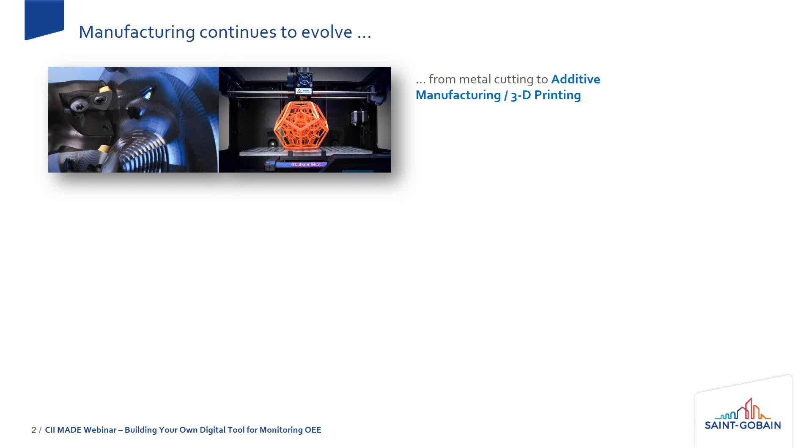Thanks to new innovative materials and new processes like additive manufacturing, what you see on screen - manufacturing was always referred to as removal of metal or cutting, removing metal from a stock bar to create what you want. Now it's about creating something from nothing, building whatever part you want through additive manufacturing, or 3D printing. This is a new evolution with digital technologies.

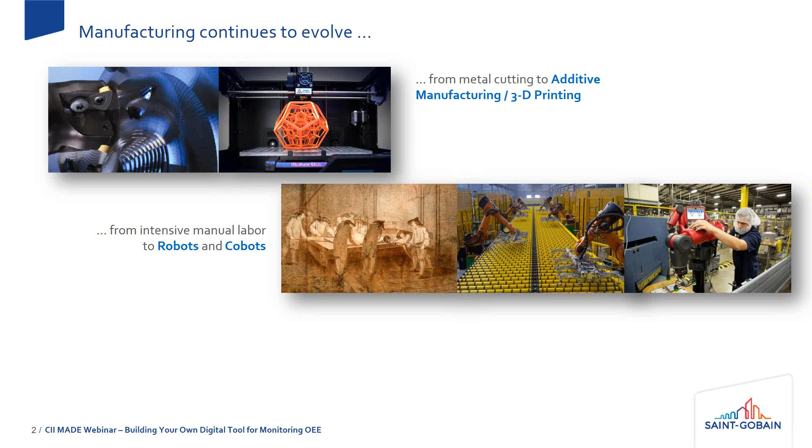Manual labor is slowly giving way to robots, which is not something new, but we also see the emergence of new types of robots called collaborative robots or cobots, which work along with people. It's not replacing people, but complementing them. They learn very fast from people and work along with them. Here you see a picture of an operator teaching a cobot to perform a particular operation - these are new generation equipment coming into picture to alleviate physical labor.

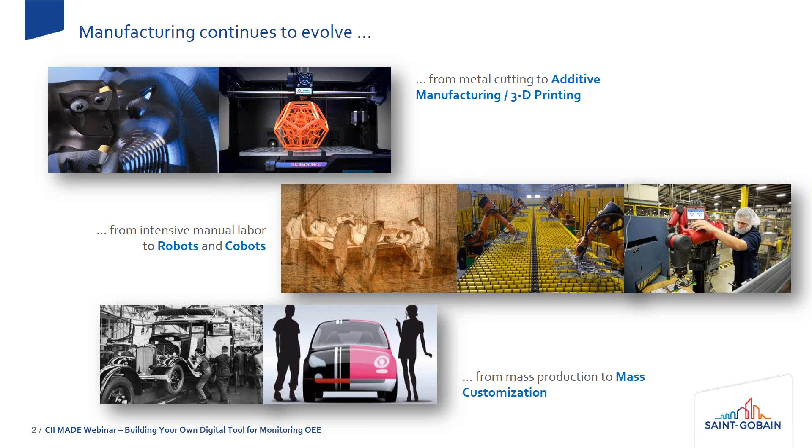And then finally, from mass production to mass customization. Today people don't want standard products - everybody wants products customized to their own wishes. So we are moving from an era of mass production to mass customization. This is very clearly seen as a trend in manufacturing today.

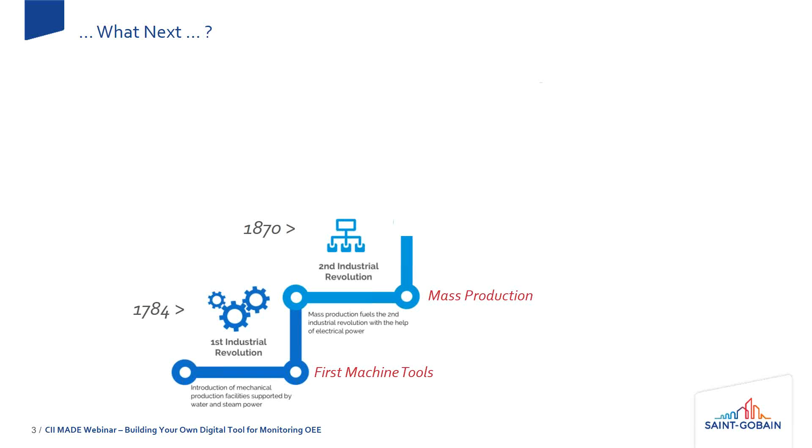The manufacturing process itself goes through a series of revolutions. Many of you are aware this started in the 18th century with the first industrial revolution, when the first machine tools were introduced, to the 19th century in the 1870s where mass production was introduced, and the 1970s saw huge industrial automation with CNC machines coming into play. Now in the 2000s we see the fourth industrial revolution, where we see the internet and several things getting connected - what we call the Internet of Things. We now see a lot of connected enterprises where it's not just disconnected equipment or disconnected lines, but everything connected seamlessly, sharing information in real time, leading to several improvement opportunities across the manufacturing spectrum.

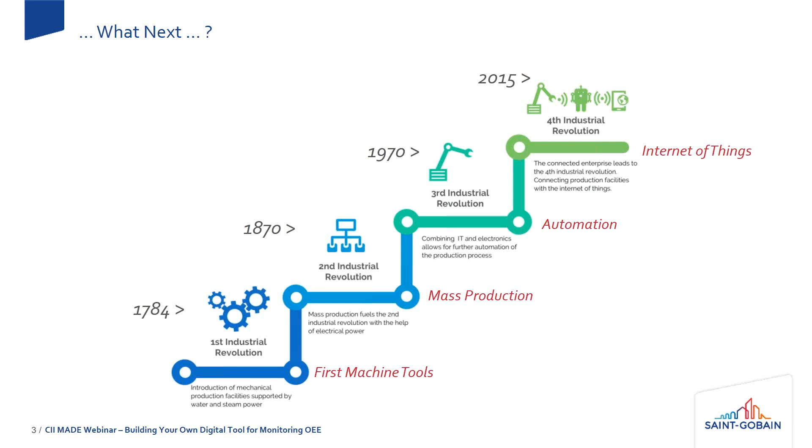So this is what we are seeing - we are at the beginning of an era which we call the fourth industrial revolution, where digital technologies are really taking manufacturing to the next level.

So ubiquitous connectivity is really driving the digital wave. I used to always ask in meetings or presentations, what is this digital all about? Digital has been there for so many years. It's not something new, the word digital has been there for a long time. So why is it coming back again? What is the new buzz about this digital?

So what is digital in today's context is your connectivity and mobility. The all-pervasive internet in the form of mobile internet is really revolutionizing the way we look at information, we share information, we control information. So this web plus mobile is the new digital.

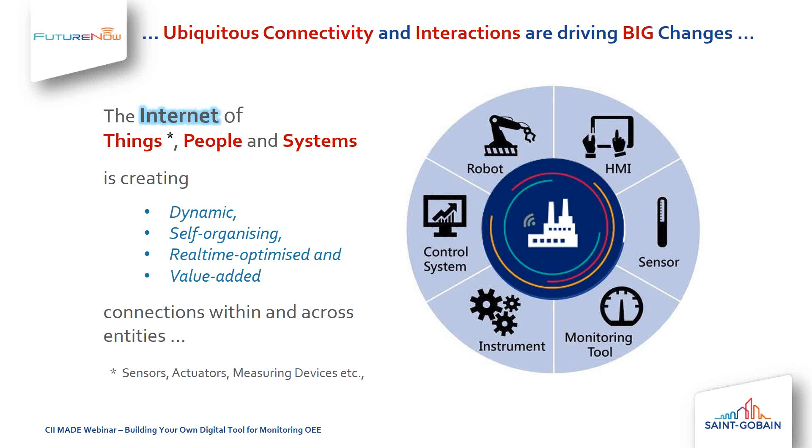To give a simple example, today a machine on the upstream can get information from a downstream machine or vice versa about the progress of production, about the quality of production, etc., so that they can change their parameters or adjust themselves so that the production process is uninterrupted and the quality of product is maintained. So such connections are today possible, and this is what is really called digital in manufacturing.

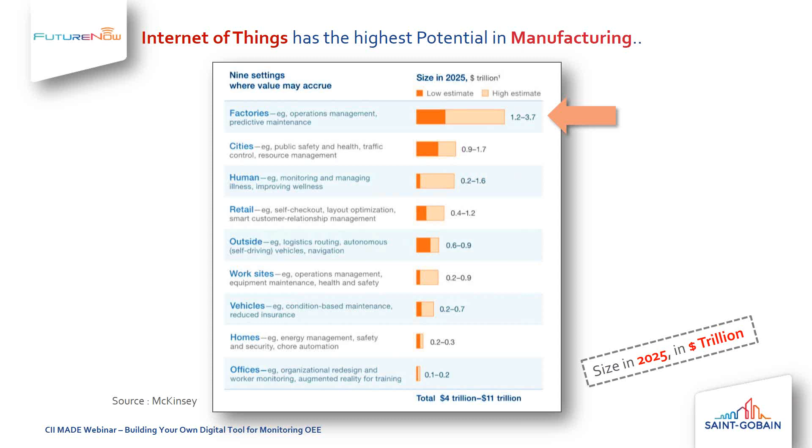And the Internet of Things, as we see, it's not just to connect equipment, but also to derive value out of it. According to a recent McKinsey survey, it has the highest potential in manufacturing. The IoT, as you can see from this slide, is having a tremendous opportunity, much greater than any other area. People talk about smart cities or retail, where digital can be used, but factories have much unexploited potential, and that's going to be really driving it big.

So this is where we also started at Saint-Gobain about a year and a half back to really start exploring the opportunities around this digital. We have identified several areas: real-time monitoring, shop floor KPIs, quick reaction to deviations, and process optimization. And I think many of these things are even being tried by many other companies. We are not unique in that sense, but everybody is trying out these areas of opportunity, be it digital plant operations, predictive maintenance, digital learning, smart products, and traceability.

So I have just listed various areas where most industries are now working to exploit these new digital technologies. In this, we have chosen today the topic of real-time monitoring, in which we are going to specifically see how one can build simple digital tools using components available off the shelf in the market, low cost, where the IT department and the maintenance or technical or instrumentation department—in various companies they call it different names—can join together, build a simple network to acquire data from their existing equipment, and then analyze and present it in real time to the shop floor manager, so that the agility of the shop floor decisions is improved. So this is what we are going to see today.

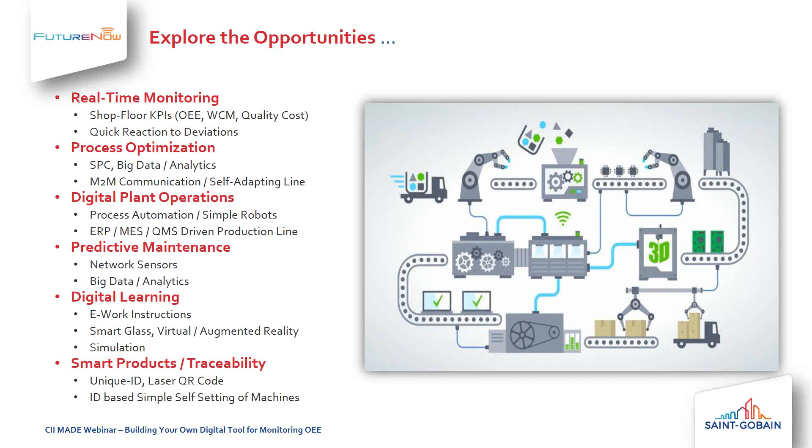When I talk about digital tools, simple digital tools, what does it mean? What was not existing in the past, and what is available today, and what is driving this big change? In the past, whenever you needed to connect to a machine, say a numerical control machine or a CNC machine, you couldn't do it very simply. You'd have to normally go back to the OEM, asking for any modification to be done to be able to capture data for whatever purpose you want to take it out for.

But today, with the availability of simple tools, sensors and microcontrollers, and the easy availability of pre-built codes—programming was earlier difficult, but today you get code very freely on the internet—by using available standard hardware components and software components, and with a little bit of perseverance, the local IT functions in various factories can also start building simple tools to do effective monitoring. There are a number of opportunities, as I listed. In every area, there is an opportunity for IT and the function to come together to really build value-added tools for the organization. So this is one of such tools we are going to discuss today, to monitor equipment effectiveness through simple digital tools.

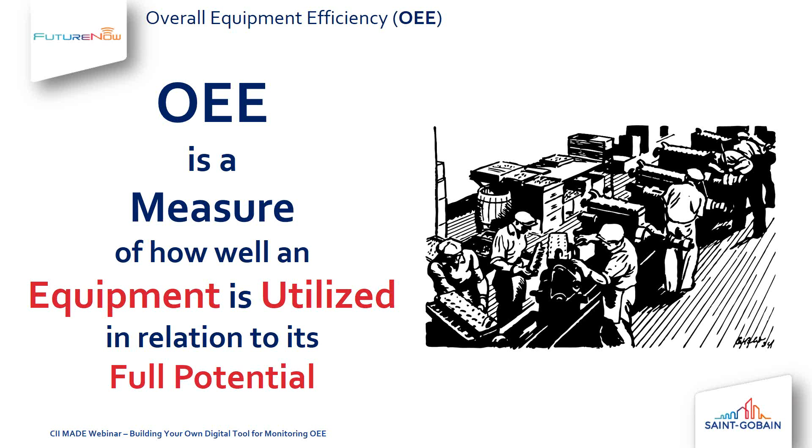So with this simple explanation, let me get into the slide. So why this OEE? What's really happening? What is impacting the utilization?

Of course, in manufacturing you have losses. Everywhere you can have losses which can reduce the utilization of an equipment. It's important for all of us to have an idea about the losses in a systematic way, so that when we measure what we have to measure to capture the OEE, we are able to work on each of these losses and then take up projects and see ways of reducing them. The whole idea of measuring is to reduce losses and then improve.

So in that context, I'm just putting the 6 big losses. This is a very standard term used in TPM. Those in academia, or those not very familiar with practicing TPM on the shop floor, can get a lot of resources from the internet. It's very important to learn this in a structured manner. So these are the 6 big losses.

Machines can break down all the time. There can be failures, tooling failure, unplanned maintenance starting from there. And also you stop the machine for changing the production, changing the components. So you keep making minor adjustments to compensate for tool wear, etc., or to improve quality. Then machines may not always run at an optimum or designed speed because of various reasons.

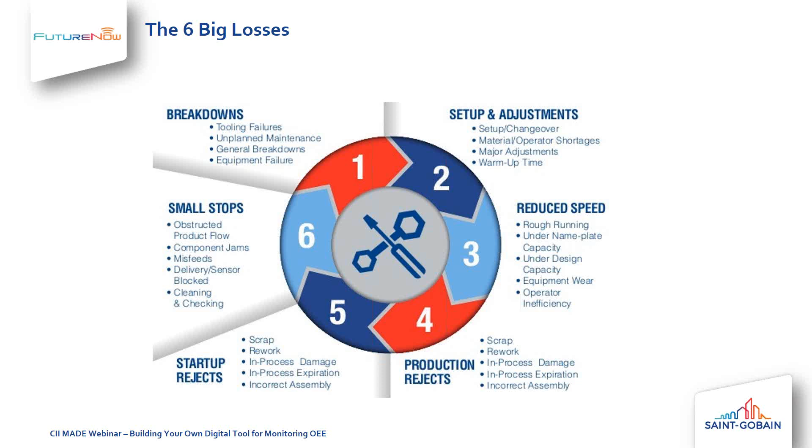So in that context, it is very important for us to understand the different types of losses that can occur at different stages, so that when you develop a system, you build these losses or reason codes for losses that can happen in your production process through a computer system. When the operator is performing an operation and there is a line stoppage, he's able to justify or record the correct reasons, so that at the end of the day or week, when you do the analysis, you can see the reasons for various losses and take corrective actions. So it's important to understand these 6 big losses.

Then when it comes to OEE, what are the things that you measure? Before you go into building the tool, we need to understand what we measure. There are 3 big measures of equipment utilization.

The first one is availability. First, the machine should be available for production. Imagine a shop floor, a machine shop that runs in 3 shifts, that means 8-hour shifts, 3 8-hour shifts. And imagine one particular machine.

The machine may or may not be available for all the 8 hours due to various reasons. You may have planned to run it for 8 hours, whereas you may have some downtime. It may be planned downtime, scheduled maintenance, or unplanned maintenance, which we call breakdown. Or you may have to do some major setup changes, change from component A to component B, remove a fixture, refit a fixture, do the setup, change the tool. So all this causes losses.

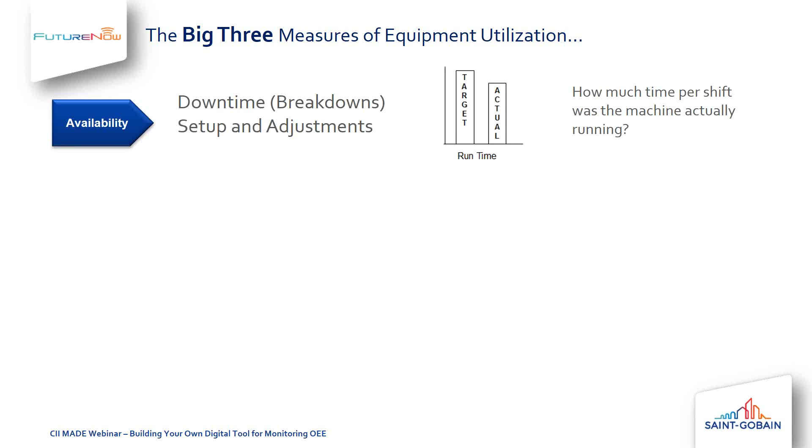So though you have planned to run the machine for 8 hours, you actually have only let's say 8 minus 1 or 2 hours if you have stoppages. So the available time is reduced because of this reason. So this is the first thing that we measure: how much the machine was actually available in a day or a shift. This is the availability factor.

The second factor is performance. The machine has been available for X hours during a day, maybe 8 or less, but it was available for X hours. While it was available, were we able to run the machine at its rated speed for all those hours or not? So this is the next measure: whether it was performing at its peak or its designed speed.

No, I was not able to run it at full speed because of various reasons. My tool was not good, there was too much vibration, so I had to reduce the speed or the feed. The raw material was not good. So for various reasons you are reducing the speed or feed of the machine, and you are not getting the desired output.

Normally, for every product you produce, for every operation on a machine, you have something called a cycle time, which you are all aware of. My production rate is based on my cycle time. Suppose my cycle time is 30 seconds, so I produce 2 pieces every minute - this is my rated production. But if I'm not operating the machine at full rated speed, I may not get 2 full pieces per minute; I may end up producing only less than 2. So this is the loss of performance - the second thing you measure after availability.

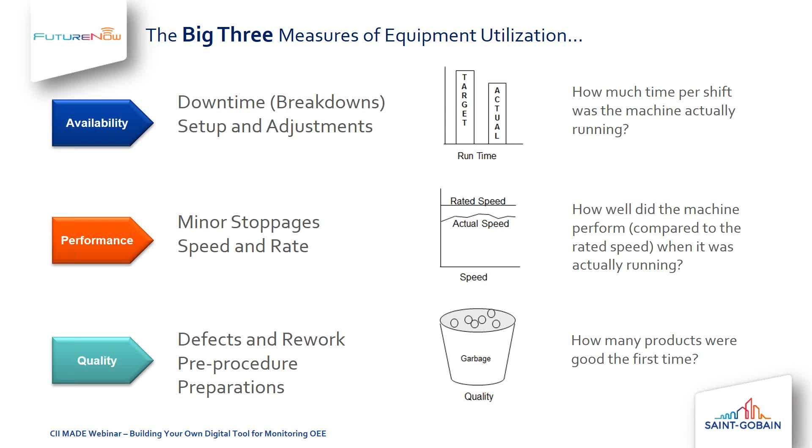So how much the machine was available to you, though rated for 8 hours - first measure. The second measure: though available for, let's say, 7 hours, I couldn't run it at full speed, there was a loss of performance - that's the performance factor. And the third: though it was working and producing, I still ended up with bad quality pieces - another loss. So these three are very important to keep in mind: availability, performance, and quality. These three factors determine the overall equipment effectiveness. So let me go to the next slide.

So how do we compute? To be following a standard formula, everybody uses one computing model. It's a very simple one based on what I just explained.

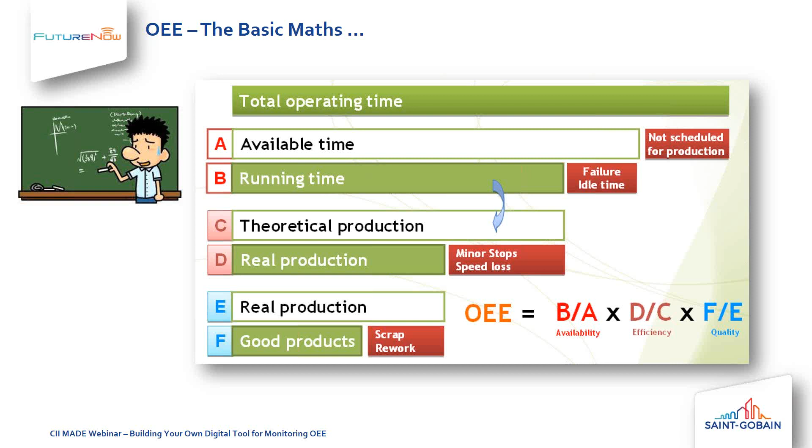To put it all together, we measure three things before we start getting into the digital tool - we clearly know what we are going to measure. We are going to measure three things: availability, performance, and quality. And let me tell you that you may not measure everything digitally.

Your time availability, you may be measuring through a computer system. Suppose if you have a scheduling system, you may say the machine is going to be available for 7 hours only because there is a planned downtime. You can also indirectly compute the availability by constantly monitoring the machine run hours.

If there is no other method to measure, you can use a simple tool, a simple encoder, to check the time during which the machine is actually running and when it is stopped. So you can also compute the actual running time. So in whatever we are going to see, there is no single method - you have to devise your own method for what you want to measure, and then use the ideas we present today to suit your needs.

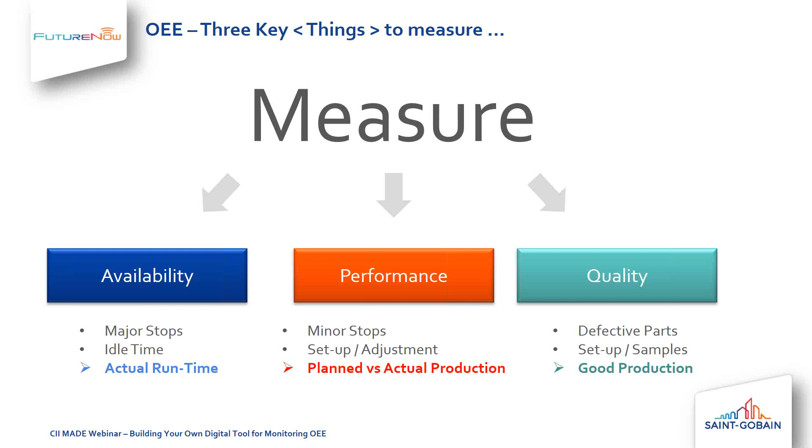What we are going to speak about today is how you can use sensors and other hardware items, which we are going to show, to really capture events, capture the speed, or capture whatever happens in the line, and then use it in your own process environment the way you want to compute. So we are typically measuring three things: availability, performance, and quality.

Before you start, you need to know what you are going to do. So I'm putting the whole thing in perspective for this project. You will start planning, choose an equipment, then choose a metric - what you are going to measure. It can be a runtime or a downtime, or it can be a part count, the line speed, anything. So each is a metric.

So in the doing part, we capture the information, we capture the event, we capture the data, and then we store it in a database, and then we analyze and compute. In each case, you may have to compute.

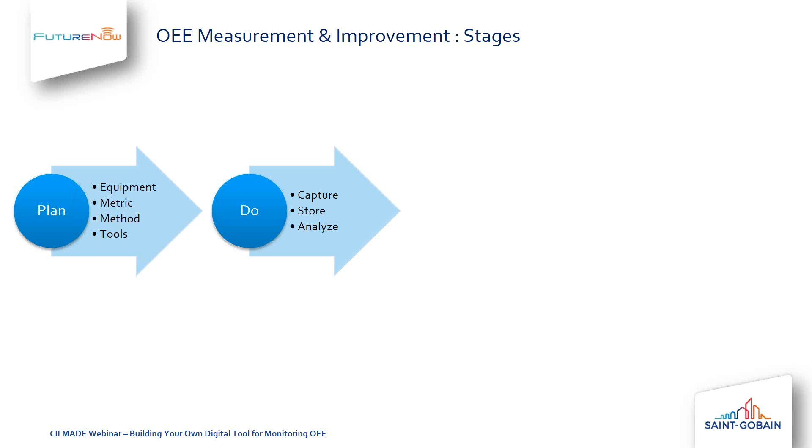Then the third one is checking. So I computed, and then how do I present it? How do I review it? How do I make sure the managers see it? So you provide dashboards, reports, and in some cases alerts, to provide this information to the decision makers.

And then act. The act part is, once you have this information with the dashboards and reports, you start improving. So you cut losses, you continuously monitor in real time, and you benchmark against similar equipment or a similar production line, and then continuously improve.

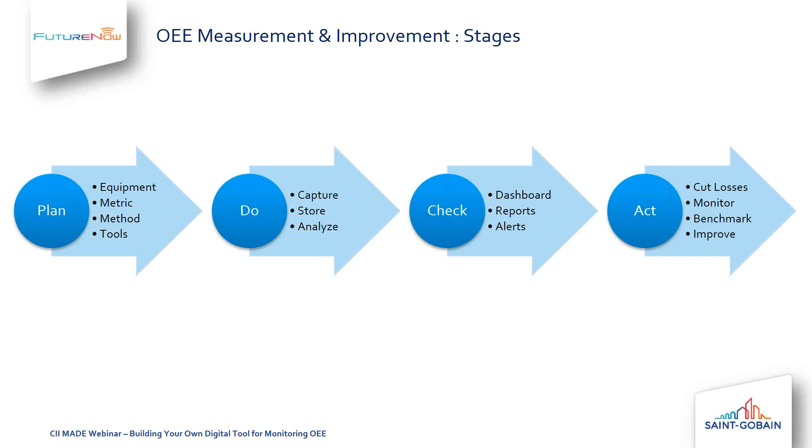So I have just presented what every typical manufacturing company will do to improve - it's a PDCA cycle. And we are also putting our own project of this OEE measurement and monitoring into this PDCA cycle, and we will progress in the same fashion.

Okay, now let's get into the real topic of this presentation: how do we build a simple digital tool to measure the OEE in typical equipment?

So let me start by - because we are going to talk digital - before we get further, I want all of us to have a common understanding. I'm sure many of you hearing this presentation are aware of these layers in manufacturing IT systems. There is also an ISA standard. So it starts at various levels.

At the field level, or level 0, you have various electronic components like sensors, actuators, IO devices, measuring devices. These are actually in the field, on the equipment, in touch with the products that are being produced. These are the actual endpoints which really measure or monitor what is going on in the line.

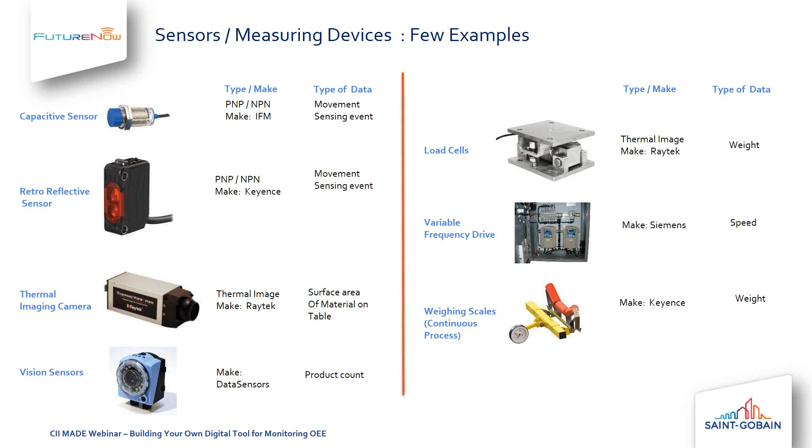So these are different types of sensors, and you will choose a sensor which is suitable for your own process. This is the first and foremost list of items that you will be interested in before you start building a digital tool.

So in many cases, you may need an IoT gateway or aggregator, and at a slightly higher level, you already have PLCs and supervisory controls. In many cases, if you already have a sophisticated line equipped with a PLC, then you may not even need to put a new sensor in the line if it's not really required. You may even be able to connect to the existing PLC and read information from it, directly taking it for processing without putting an additional sensor.

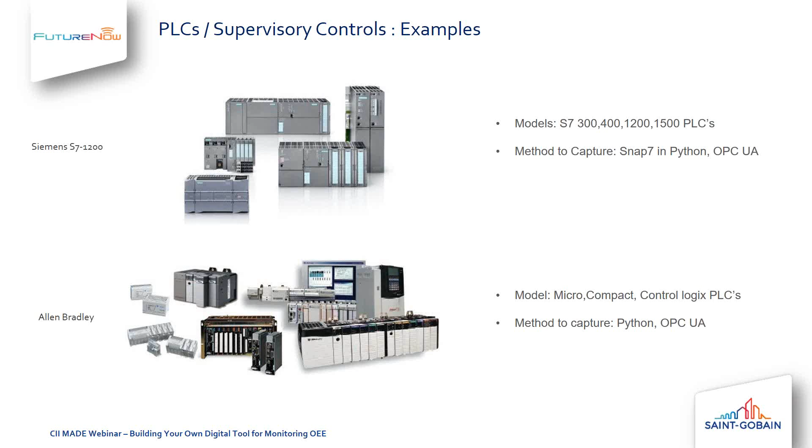This is also possible in some cases. You have to check your own process. So PLCs are another layer. And then the new generation of microcontrollers is making things very interesting today.

Today we are going to talk a lot about these microcontrollers, because here is where building your own digital tool comes into picture. If your line is already equipped with a variable drive, a PLC, and a SCADA, you are not going to really think of building your own tool. Most of the information you want is already available in your own system, you are not going to take it out. But in many cases, the machines are not really equipped with PLCs.

So you have a lot of conventional machines, discrete machines, different types of processes. Those people are really interested to know how, without investing a lot on OEMs and PLCs etc., using simple sensors and simple off-the-shelf items available in the market, they can build their own digital tool to get the information they want. That's where this kind of microcontroller comes into picture.

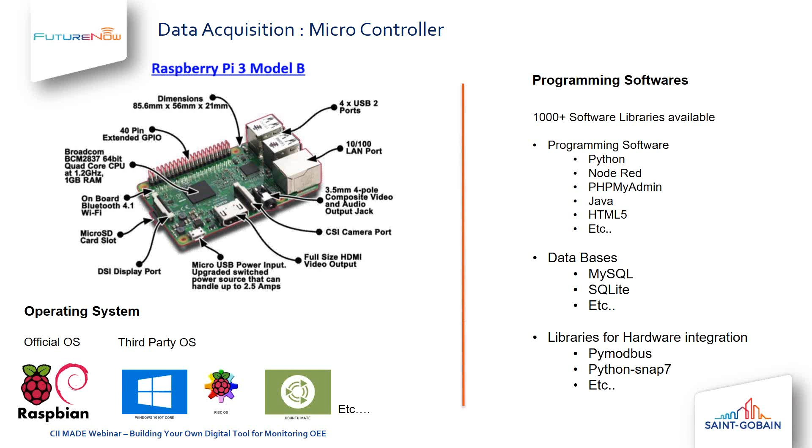So this is what is getting done most of the times. The Raspberry Pi microcontroller comes with GPIOs, which are input-output pins, where you can pass on signal and read it from a program which runs on the computer. Basically, you have ports or memory addresses which can be monitored by a script that continuously scans this memory and detects if there is any change in state.

So this is what we are going to do today. You have signals processed by the sensors connected in the equipment, picked up by a relay, and then transferred to the microcomputer board onto a pin, which you can see on the right side at the end point. You see the microcontroller pins on the Raspberry Pi, expanded and shown here.

You can connect up the relays to the microcontroller board, and there are hundreds of projects listed on the internet. If you go to the Raspberry Pi site, you can learn; it doesn't really require great electronics knowledge. With a little bit of interest, you can find hundreds of projects done using the Raspberry Pi microcontroller and off-the-shelf sensors and whatnot. We have just used one of such ideas, and that's how this has been developed.

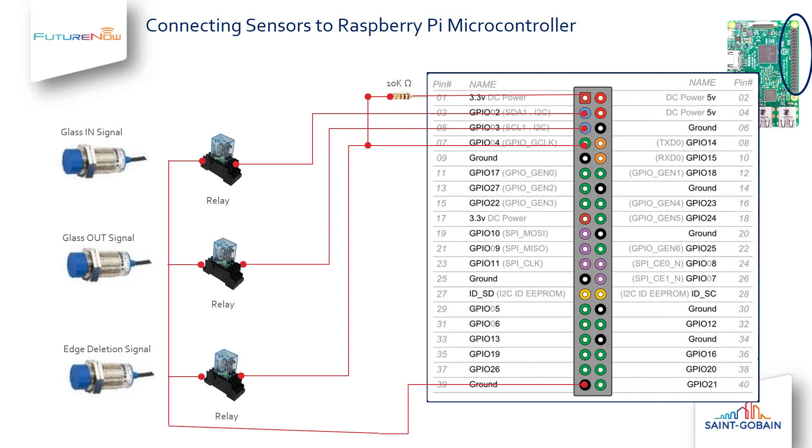Now coming to how we actually measure OEE, or how we use this setup to measure what we want to measure for the OEE part. In our case, I'm starting with an example where I have a conveyor where a part is moving, and some process is performed on the part while it is under the spindle of the machine. There is a sensor at the incoming stage when the part enters the machine bed, and a sensor on the outside when, after the process, the part moves out of the bed.

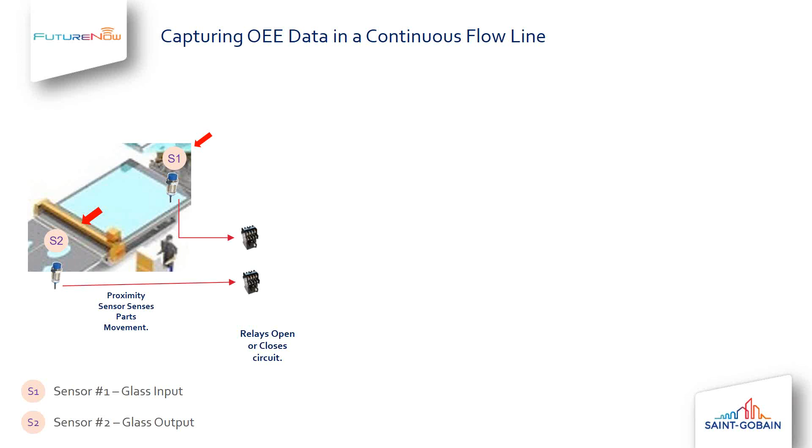So you have sensor 1 and sensor 2, which show the glass input and glass output in our scenario. There are 2 proximity sensors kept. As the glass moves over, sensor 1 and sensor 2 start counting the parts and send signals to the relays. When a part moves over the sensor, the sensor is connected to a relay, and the relay opens or closes based on the signal sent by the sensor, which is picked up by the microcontroller.

The relay is connected to the GPIO pins as I showed in the previous slide, and then there is a Python script running continuously in the microcontroller or the Raspberry computer to check the status of these pins. This program can continuously scan and read changes in the state of the GPIO pin.

The moment there is a change of state, that means the relay has passed on a signal saying that proximity sensor S1 has sent a signal, which means one part has moved over. The program registers that S1 has sent a signal at this point of time, and then it looks for a corresponding signal from S2 and waits for it. When S2 sends a signal, you know one part has moved in and moved out.

Using these two events, you can capture a lot of data, like how much time it has taken to get the signal from S1 to S2. That means the cycle time of this component on that bed is the time of S2 minus the time of S1.

Number two, in a period of let's say 8 hours, how many times have I received the signals? What is the count of parts that I have gone through? I know the theoretical time - in 8 hours, if the cycle time is so much, I should have received so many counts, but I have not received so many counts. That means there is a loss of production.

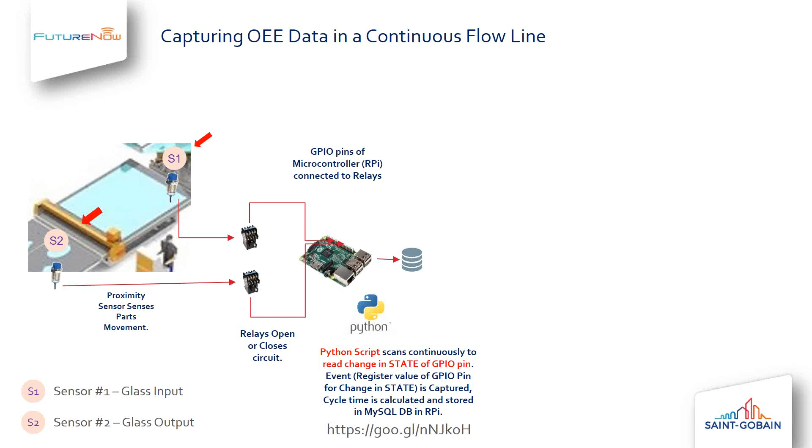So just using these two sensors and capturing the signals, you can build a lot of information using this program on a simple tool. Then the data from the microcontroller is pulled through a firewall into a server which is kept in the plant network.

The firewall ensures that the information is very well encapsulated between the industrial network part and the other plant network part, because today this is one important part of cyber security. You cannot pass information from the open internet or open network into the industrial network, which can really corrupt the industrial control systems and cause problems in the production equipment, which is not allowed.

So you put a firewall between the industrial network and the plant network to allow signal to pass only one way, and to specific ports from A port to B port, and only specific protocols or specific ports used by specific applications. For example, if I am using a MySQL database, I need to open only a particular port, let's say 3306, a TCP port. Such rules can be built into the firewall, which is very, very important.

When we try something like this, we should not get blamed saying, oh, you connected the machine directly to the network and some virus has flown into the industrial network and my CNC computer is down. Such nuisance should not happen. So we carefully isolate the plant network and the office network.

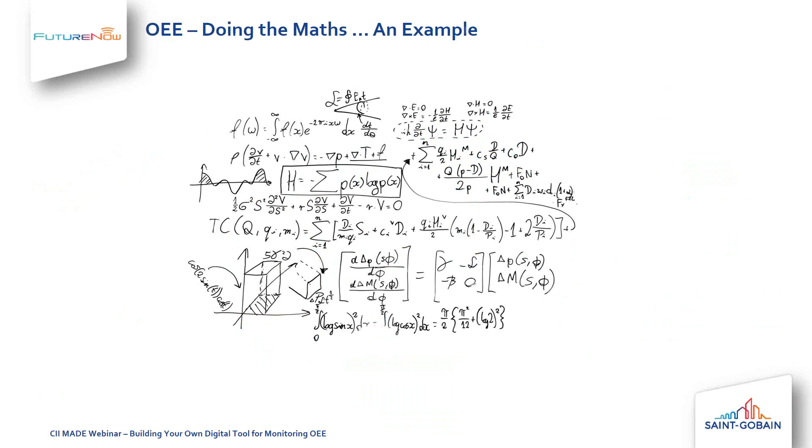So once you have the data, then we have to do the maths. I think this is done in the database server that I showed you. So you simply do a step-by-step calculation.

Once you get the data from the sensors, first we compute the availability. The shift was, for example, 8 hours into 60 minutes, so I had 480 minutes, but there were two big stoppages which the operator confirmed through an application: a big setup change which ran for 40 minutes, and a breakdown of 20 minutes. So I lost 60 minutes, meaning I had only 420 minutes. So my availability of the machine was only 88% - I lost 12% because of my setup change and breakdown.

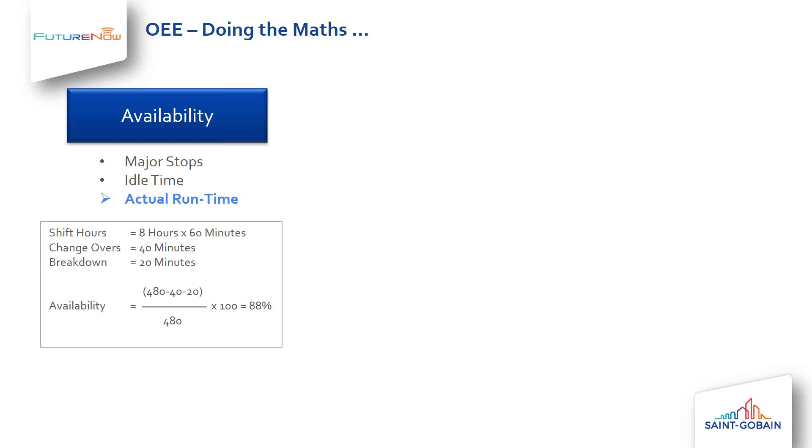Then next I compute my performance. This is where you use the sensors to know actually how many pieces were produced and at what time frequency. Taking the first step, I had 420 minutes of time available. My production rate at ideal conditions should have been 2 parts per minute, so I should have produced 840 pieces. Actually, I ended up producing 800 pieces - at the end of the shift I know this because I used a sensor to count in real time.

So I lost 40 pieces because of some poor speed - maybe I was doing a small setup change, a tool change or tool dressing, or had to run the machine at a lower speed because of poor quality raw material or whatever it is. So I ran it at a less than optimal rate, and lost 40 pieces, meaning 5% of my performance. So my performance factor was only 95%.

Then I go to quality and check the parts I have produced. For example, I produced 800 parts, out of which I found 30 to be defective and 20 to be scrap. So in good production, I could only get 750 parts. So my quality rate was only 94%.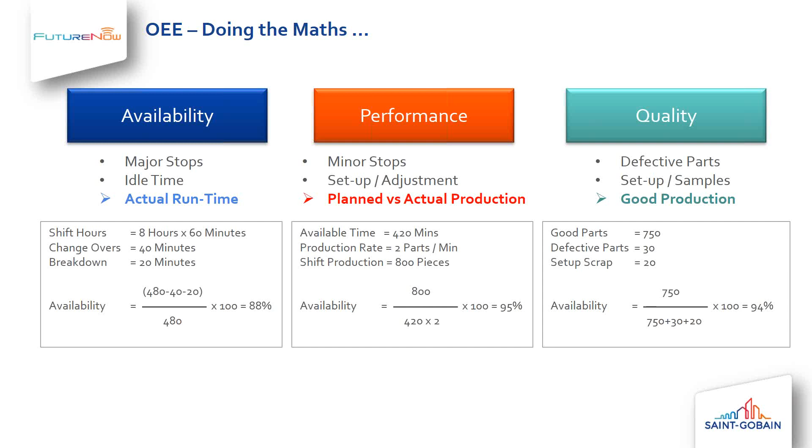So all three of these factors contribute to my OEE. My final OEE of this equipment for that shift was only 79%. You can compute this in real time because you know the planned time for the machine, and the stoppages - when the signal was not being received from the sensors, you consider them as stoppages and ask the operator for the reason, putting them into the respective bucket, whether an availability issue or a performance issue. Then at the end of the shift, you also have the quality data coming in.

In some cases, in continuous process lines, we can always ask the end-of-line operator whether the part is okay or not by pressing a button. So you also measure the quality rate continuously, and you can compute this almost in real time, and then show that you have this OEE.

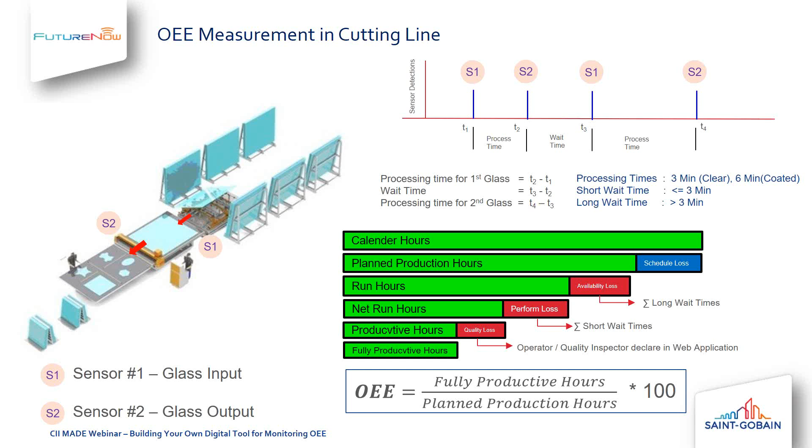So this is what we had done. This is an example from a continuous processing cutting line, where we put two sensors. I showed you how the sensors capture the data, and the program computes the OEE from the planned hours to the run hours, net run hours, productive hours, and fully productive hours, which is the time I really had to produce good quality parts, the real output of the machine.

Here you can see it is a continuous thing. First, whether the machine is running or not, you get a signal at the top, because once the machine is continuously running, the sensors continuously send data at the desired rate. So if you don't get information for a stipulated time, you say the machine is not running, the red light glows, and you go and see what really happens, and then start integrating the data. Then you can see the total time the machine has run, and whether there is any schedule loss or availability loss.

Then there is a performance loss and a quality loss. You can see shift by shift. In our system, we benchmark between the 3 shifts to say what is the part count and cycle time for each item, how many pieces were produced, and what is the real OEE of the machine on a continuous manner.

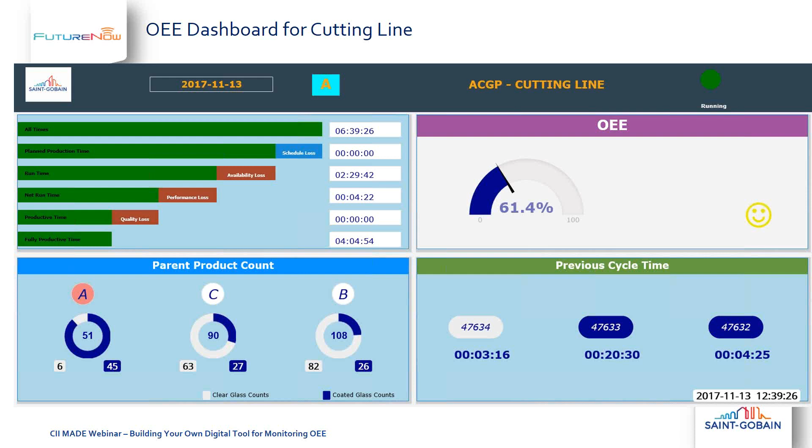So this is the example of a dashboard, and I'll show you one more process where we use a different type of sensing. Here we use a thermal imaging camera. In the earlier case, it was a proximity sensor to count the parts, because in that machine that's what matters—you have to see one item going in and the same item coming out.

In this case, it is a furnace. So you need to know what is really happening in the furnace, because it's not a quick process where you just cut and send. Here you do the tempering process, so you need to know the load on the bed, the surface area, etc. For this we use a thermal imaging camera to capture, but the concept is the same.

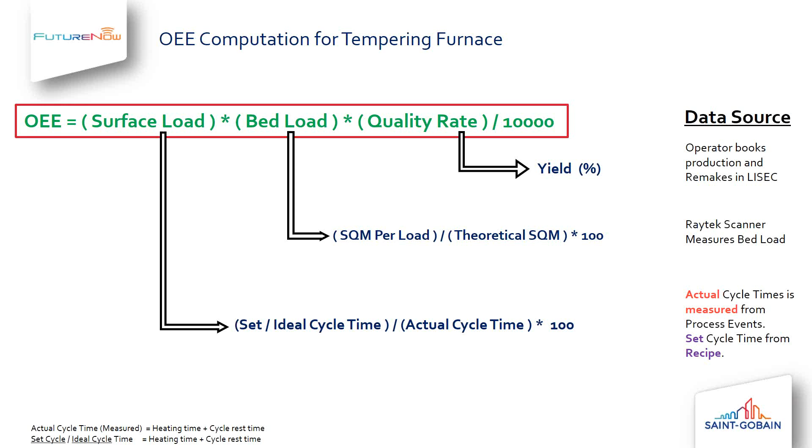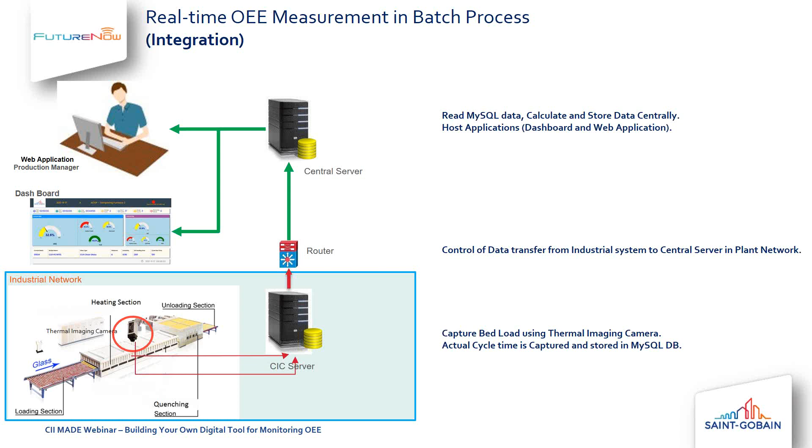So these are two different processes, but as you can see, almost every item is built with simple low-cost tools. Again, this uses image processing with a standard thermal imaging camera, and the data goes into a simple MySQL database, where you process and get the area information, and then compute the OEE.

There are several such examples I can go on quoting, but the real thing is, as I showed in the PDCA map, you have to really understand your process, what metric you want to measure, and what is the best tool and method to measure it to get the computation of availability, performance, and quality losses.

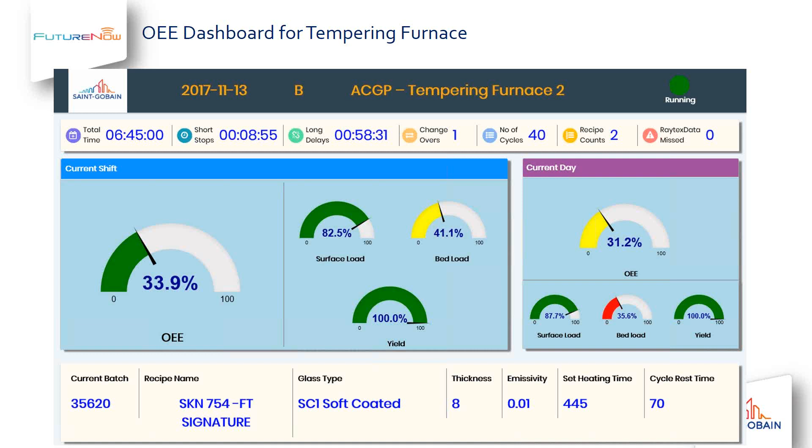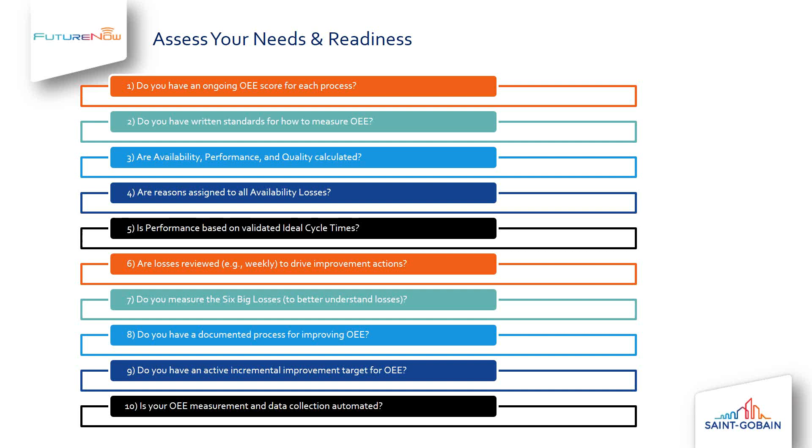So this is what I wanted to present. I'm sure some of you may have questions, so I am ready to take them up, and I can go back to any slide if you really want to see something in more detail.

As I said, this is clearly an example built in our own production environment, and you can use many of the generic concepts we have presented here, but you have to really build with respect to your own production process. You have to build your own method and tool, and you can use the generic flow we have used here to build your tool and dashboards. Thank you.

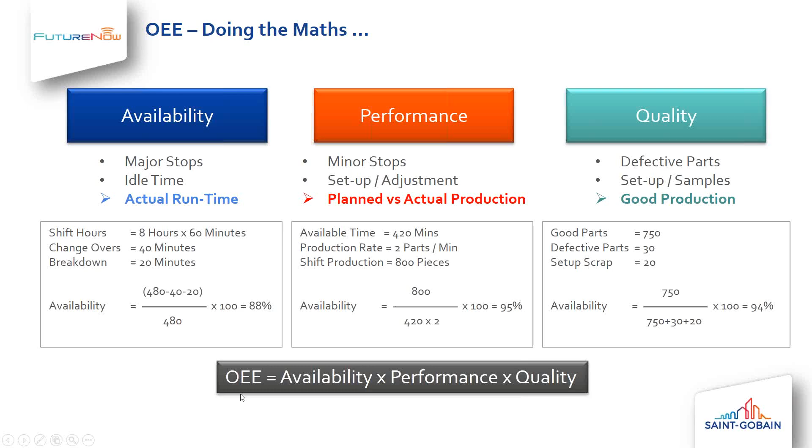The second program, the second software we wrote, is for the dashboards. Here again, we built our own dashboards. We use .NET and the MVC framework using the data in MySQL software, and then we presented it in a simple graphical form. So both the softwares were written by our internal teams.

And there's another question from Mr. Arun Kumar. He's asking, most people calculate without planned data. Is this the correct way? No, I don't think it is the right way.

So you always have a norm. We always start with the plan, because that helps you to really show where you have lost, basically whether there was any loss in the availability part. If you are not even planning to run, that has to be captured and included in your reporting accordingly. If you don't start with the planned data, you miss that part. So you always start with the plan, and then you say what is the time that you are planning to utilize the equipment, whether it was fully going to be loaded during the shift or not, and then you start working. So for computing the availability factor, you really need to include the plan. This is my answer to this.

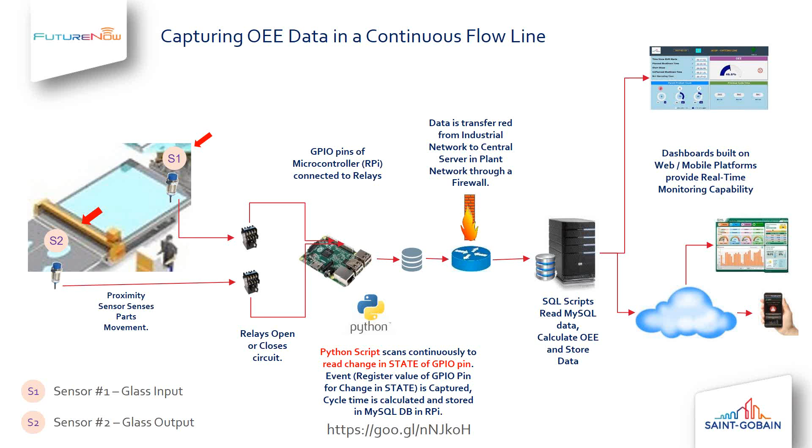The answer is yes and no. You don't normally connect the data from the shop floor directly to the ERP, but you go through the layers, as I showed in one of the slides in my presentation. Typically, you have to go through at least some of these layers. The ERP normally sits at level 4, and your IoT is at level 0 or level 1. So normally you process data within the industrial network, within the plant network, and sometimes you may end with that. If it's for producing a real-time alert, you may not even go to ERP, because your purpose is to produce an alert in the shop floor to modify the process.

But if you are going to capture the production rate or production quantity through an IoT, then obviously you will want to pass on the information upwards. Typically you may or may not have a MES. In some cases, if you have a MES, it's the one which captures the data first from the shop floor, and then can aggregate and send it to ERP. So even SAP, being an ERP, has two layers of software: one is SAP ME, a manufacturing execution system, and then SAP MII, a manufacturing intelligence layer. That is what really gets connected to the line, the sensors or the hardware. So even SAP has two layers of software between the ERP layer and level 0.